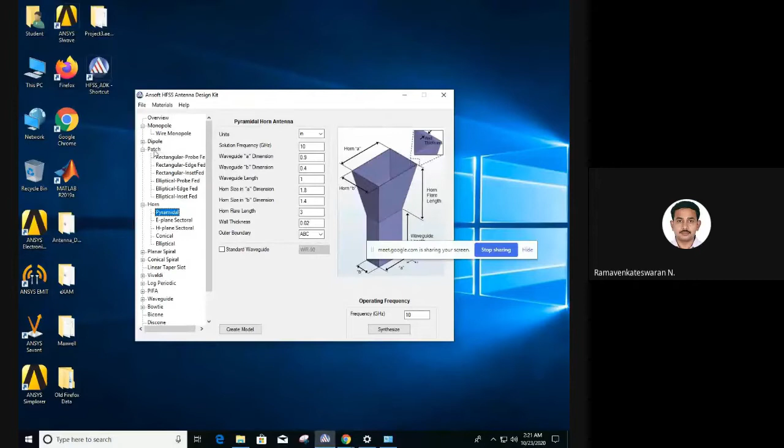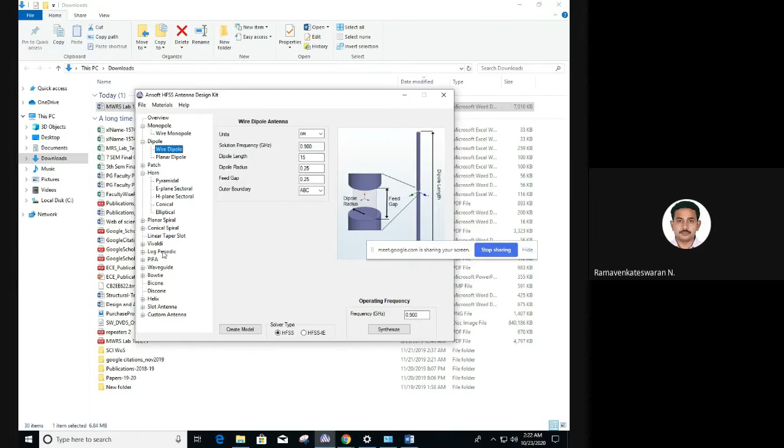Probably this is a wire antenna. This is not a 2D. This is a 3D. So these dipole antennas are typically used in the normal modem of Wi-Fi routers and these structures. We typically use this antenna because it will have good reception power and transmission power. So this is a wire antenna, and also we have a printed type dipole antenna. This is a planar where we cannot have the 3D. When we want to print the antenna, we can use that planar.

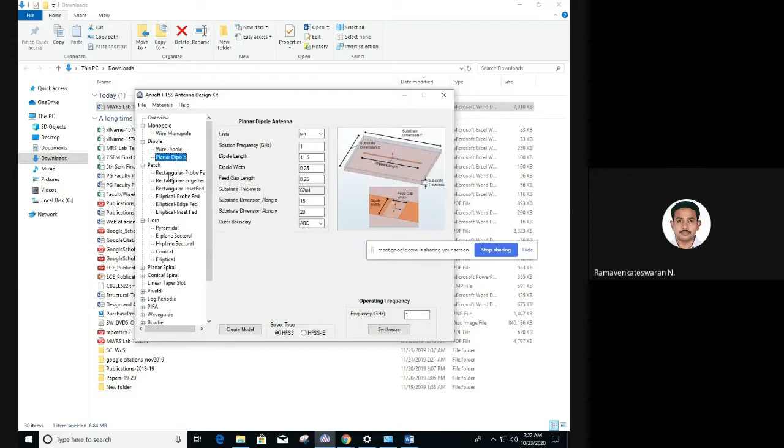So in this experiment, we will be using this planar type, and probably I'll just check that. I will check the manual and tell you. But for the patch antenna we will be using this probe feed, rectangular probe. You can either use the edge feed. You can see the difference. However, all the steps are similar, and we have a pyramidal horn.

Usually it will be waveguide type. So there won't be any printed type for a horn. Basically, this is typically used in high power transmission, either in radars and satellites, so we will have high power transmission using this horn antenna. Okay, this is an antenna design kit, high frequency structure simulator.

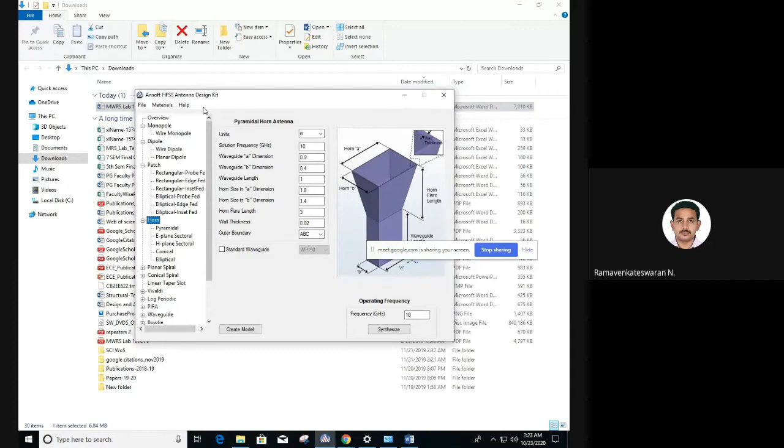Let us start with a patch. I'm going to take a rectangular probe feed, and I can choose any frequency. Let us take 2 gigahertz, either 1 or 10 or 2, anything is fine. When you just synthesis, what happens, right? 1 second. This is,

Yeah, correct. So when I do the synthesis, these values, like the rectangular patch dimensions, you can see them. I cannot expand this window. Probably you can look closely where I'm moving the mouse. So all the units are given in centimeters. You can see the solution frequency, whatever I synthesized, 2 gigahertz, and the patch dimension. So this is my Y and this is my X dimension.

So it's a rectangular type antenna. X and Y need not be the same. It's a rectangular patch, and the dimension is automatically calculated by using synthesis. So if I don't have this design kit, I have a set of equations that are typically empirical equations, meaning it is basically calculated by using the operating frequency. We have a set of equations that will calculate my patch dimensions X and Y, and also the thickness I can keep constant.

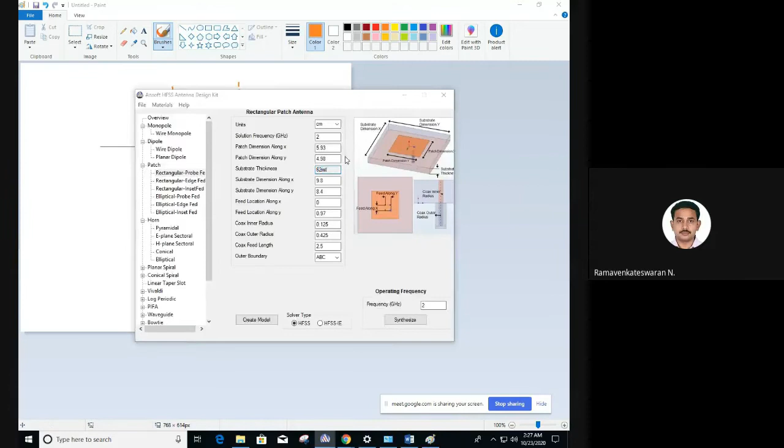So what I have is the patch dimension. So this is my patch. I'll take the other one. I fill it with some color. Okay, this is my patch. This is my substrate. Okay, the patch dimension, I'll take the pen. So this is typically the patch dimension that is given here. That is x. This is y. So here this is y, and this is my x.

Okay, and what else? Substrate. The substrate is typically this. The substrate dimension is y. Let me pick another color. This is my substrate y. The notation is given as both x and y, and this is my substrate x dimension. Okay, so the feed location is this point, exactly at the center. The standard reference is that this is 0 comma 0, exactly at the origin.

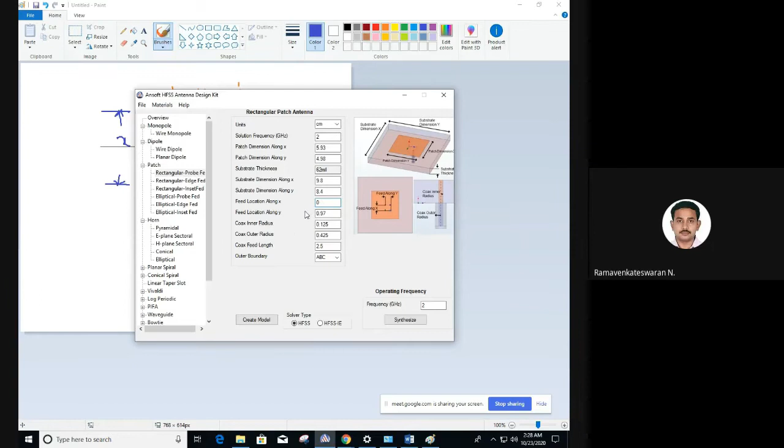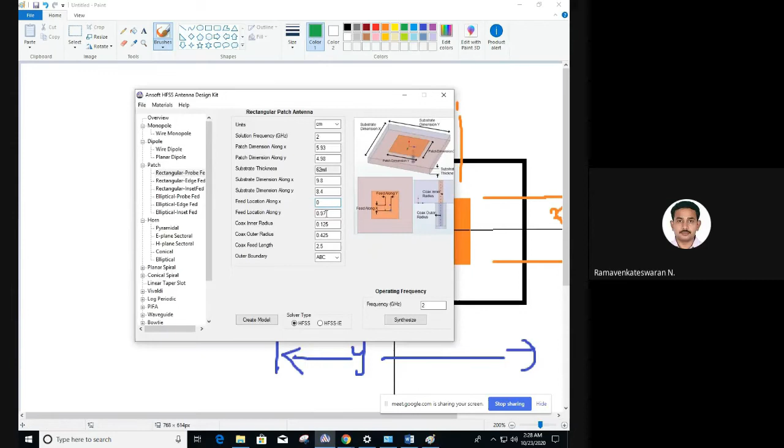I mean to say that x and y both are 0, and you can see that the feed location is a little drifted along the y-axis. Here somewhere is the y location, this is my x. x is 0, y is a little drifted. I'll use a contrast color. So this is my y. This is my feed location, exactly 0 comma 0.57. x is 0, y is 0.57. This is my feed location.

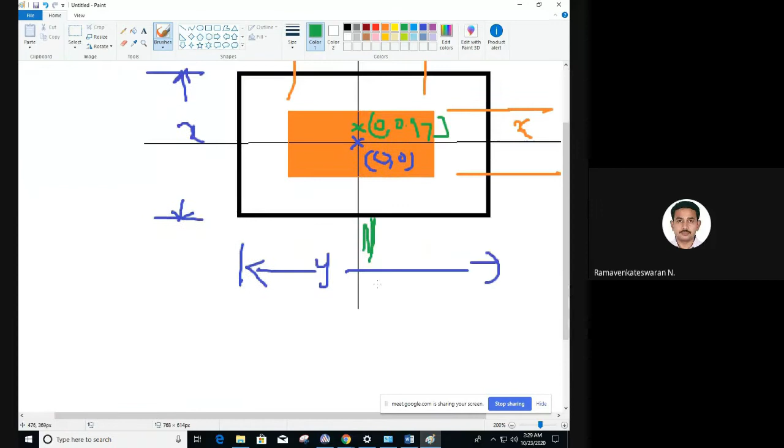So beneath that I'll have one probe. This is 3D, but you can understand that beneath it one probe will be there, connecting exactly to this point. So this is the construction of the patch antenna. Is it clear? The power is fed into this point, that is the feed location. This is my patch dimension x and y, and this is my substrate dimension x and y. So how do I know this exactly? Because this is a design kit. Indirectly they have a lot of algorithms to address those equations. If you give only the synthesis frequency, that is typically enough.

Okay. So that should be a reasonable value. I don't touch it, I leave it as it is. And what are the other points? The coaxial inner radius and outer radius, that probe is there. You can see that if I do the coaxial feed, this is the outer radius of the coaxial line. This is my inner radius. So that is the feed. These are all default standard values basically.

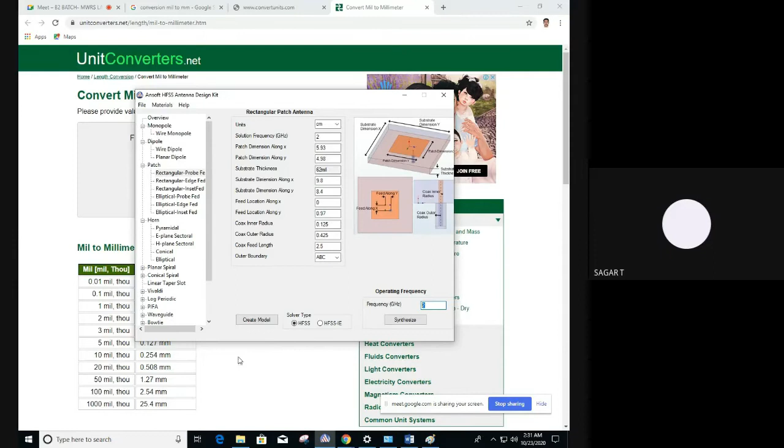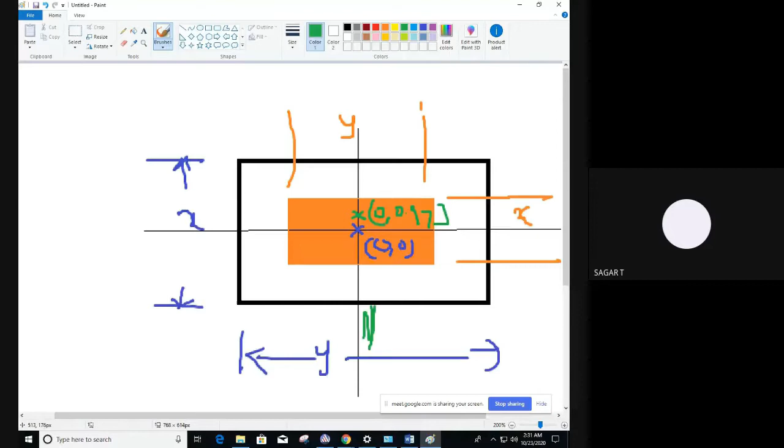Okay. So if you change this, for example, one difference I'll tell you. When you change the operating frequency, I mean the synthesis frequency, what happens to the dimension? Just keep any one of the x and y values, either this patch x y dimension or this substrate x y dimension. Probably I'll copy it as it is. I'll just look into the patch, for example.

This is my 5.93 centimeter, correct? Unit is centimeter, fine. That is my x. I'm keeping y, this is x, right? This is 5.93 and this is y.

So as you can see, this diagram is not in scale, as you can easily observe, because this is a higher value and this is a smaller value. So it's supposed to be like this. Sorry, let me just cut this, or something like that. Okay, now is it fine? Still not fine, because y is small and x is more. Okay, probably I will fill it with more color in this direction. This. Okay, probably it's fine now. Okay, so that way.

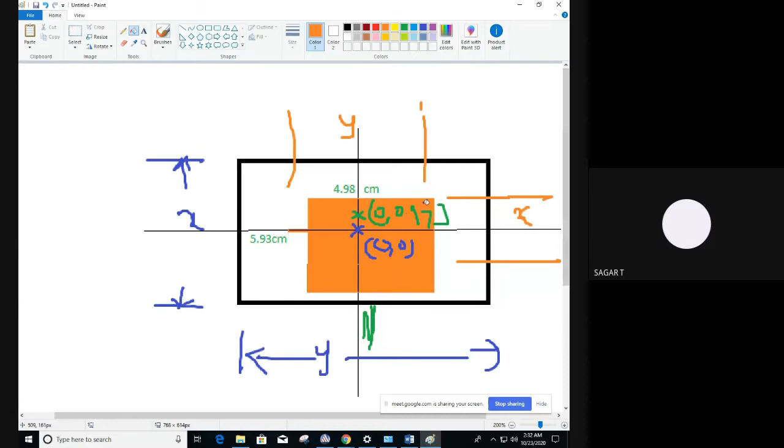Okay, now y is 4.98 and x is 5.9. This is a little bigger. Okay, so my design frequency is what? F is 2 gigahertz. Okay, so now I'm going to change my operating frequency. Let us take 5. I'm increasing it. So what you can observe here is even these values, the inner radius and outer radius of the cable, are also changing.

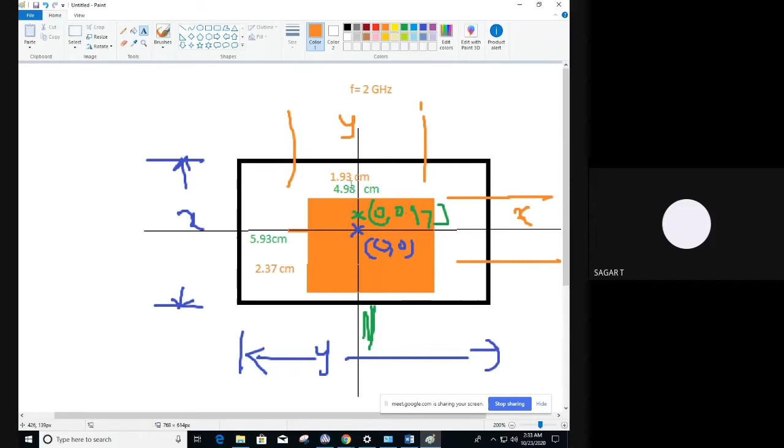And most importantly, this patch dimension, you can see that 2.37, that is x in centimeters. So it is actually decreasing, and y is also decreasing. Okay, so whatever is in orange color is for 5 gigahertz, and whatever is in green color is 2 gigahertz. So what happens now, whenever frequency is increased, the patch dimension is coming down. How is this related? So whenever frequency is increasing, lambda of course is decreasing, right? Because C equals lambda F.

When frequency increases, what happens? This is C by lambda. As frequency increases, lambda is decreasing. So when I design the antenna, I should make sure that the physical dimension of the antenna, either patch or any antenna, the physical length of the antenna should be less than or equal to lambda by 2. This is one of the prime criteria to design the antenna. So if I increase the frequency, the operating wavelength comes down, and when the operating wavelength comes down, the physical dimensions also should come down to design the antenna.

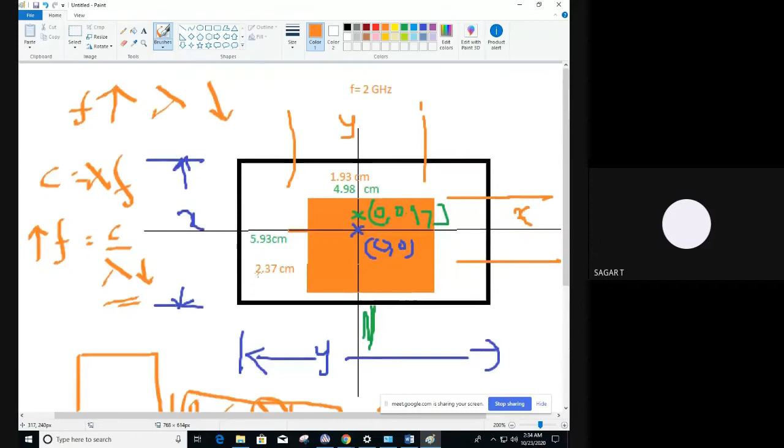So the high frequency antenna will be more compact. That is one of the reasons for going to a higher operating frequency. I can actually fit the antennas in an aircraft and even small mobile phones. I can keep that antenna with small dimensions, a small form factor, so that my antenna works at high frequency. That is a huge advantage when you're going for high frequency.

There are always pros and cons in high frequency designs. If antenna dimensions become smaller and smaller, that is good, but the thing is, it cannot receive or transmit more power, because the area is one of the criteria. It's something like rainwater harvesting: how can you store more water? If you have more terrace area or more open area, I can collect more water. The same thing, if an antenna is bigger, I'll get more power transmitted and received, and gain, of course, will be increased.

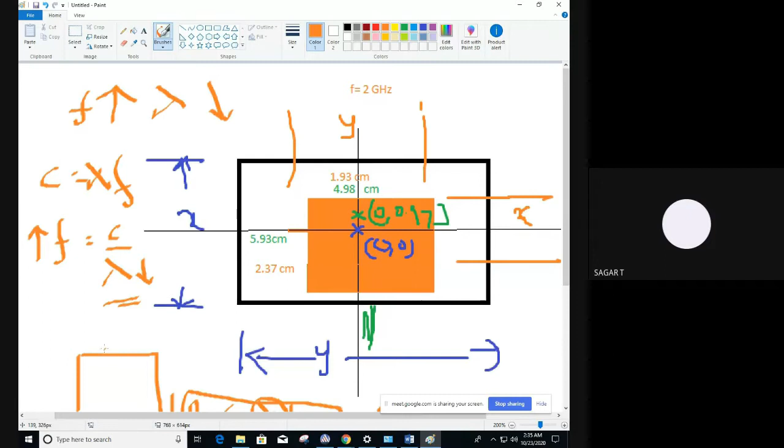So we have to balance it. How much the frequency should increase, how much gain I want, I should balance these two, and I have to effectively design the antenna. Okay, that is the theoretical part. So here, similarly, if you keep increasing, keep watch of this coaxial inner radius.

I will see that. If it is working, then not a problem.

So here, I hope that you got some points. When frequency increases, the operating wavelength is coming down. So the antenna dimension is supposed to be equal to the wavelength, or it should be less than that. So in high frequency antennas, the operating wavelength is very small. The physical length of the antenna will come down. That is a huge advantage when you want to design compact antennas. But the high gain of the antenna will become compromised, basically.

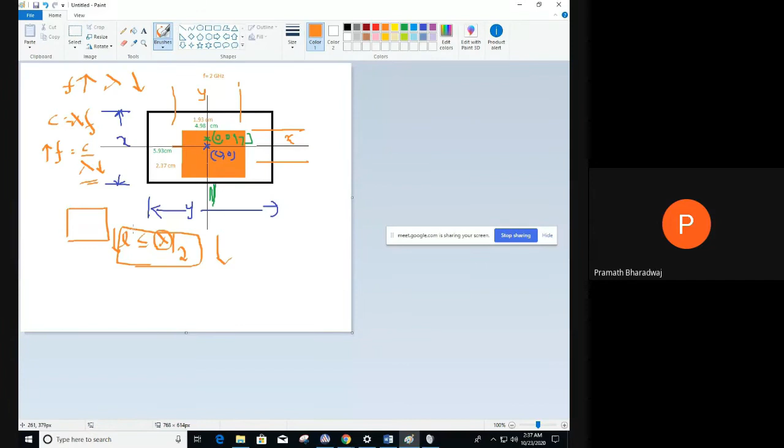So the technique we use is, instead of keeping one antenna, I'll keep multiple antennas. That is one of the reasons for going to 5G technology, where we have multiple antennas, multiple input, multiple output, MIMO antennas. So it can effectively work in high frequency, and also it can have more gain, basically. Okay.

Sir, when you teach, the voice goes low. Use earphone. Okay. Is that? I'm keeping very close. Yeah.

So here, is that clear? We have very high frequency. The wavelength is coming down. Antenna dimension also coming down. So compactness I will get, but probably I have to compromise on gain. So to compensate, the antenna is smaller for high frequency, and also to get more gain, because I need to transmit more power, so it has to be more.

So to balance this, I may keep more than one of the smaller antennas. That's called antenna arrays, so that I can operate in high frequency, and also get better transmission and reception, because the gain will be multiplied with the number of antennas. Okay, so that is a practical project: using more than one antenna to work in high frequency, getting higher gain and higher streaming of videos. Everything they are projecting is to get higher bandwidth, basically.

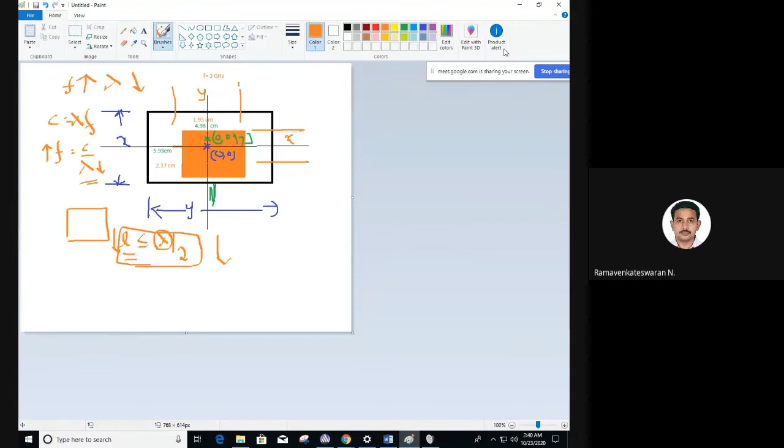If you go to 10 gigahertz, you can see that the coaxial radius is also decreasing and length is also decreasing, and the patch dimension is again coming down. Okay, 1.19. So initially for 2 gigahertz we had 5.93, it came down to 2.37 for 5 gigahertz, and further it came down to 1.19 for 10 gigahertz. So basically, the antenna dimension is coming down.

And the materials, I can choose any materials here. I think it's taking time to open. What I'll do is take the 2 gigahertz, synthesize it and go to material substrate. I'll wait some time for it to open. If not, you can also change it in the HFSS electronics desktop. There also you can change the material. If it is taking time, then we go to create model.

Indirectly it calls the electronics desktop, the ANSYS Electronics Desktop. It will invoke the software. This is the main software, where we will be starting the simulation. So the advantage of the design kit is I don't need to physically draw the antenna. It is available. I only have to synthesize my design frequency, and it will automatically calculate the dimensions. Probably I'm waiting for that to open.

Let us check. Again, I will try that. HFSS ADK, go to patch, rectangular probe-fed, and go to a smaller frequency, so it is better. Let us go to synthesis. Let us take substrate. If it is not coming, try it again. The substrate material is taken by default. You can choose any material.

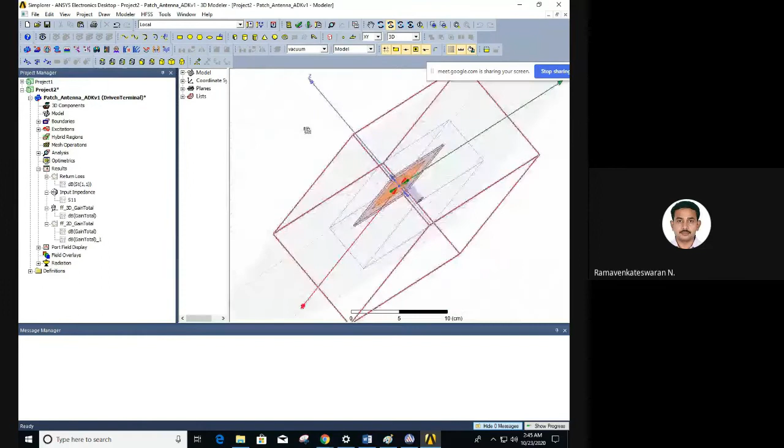The advantage of this design kit is that the antenna, substrate, and these two boxes are automatically created. I'll tell you what these two boxes are and what you designed in the antenna design kit. Probably I can rotate around the current axis. You can see the 3D structure. This is called structure simulation.

ANSYS is typically a mechanical tool, a finite element modeling tool, where mechanical engineers model structures and simulate, for example, thermodynamics and aerodynamics. This is structure-level simulation. This is part of an FEM tool, like a finite-difference time-domain, FDTD, tool. We divide the structure and simulate it.

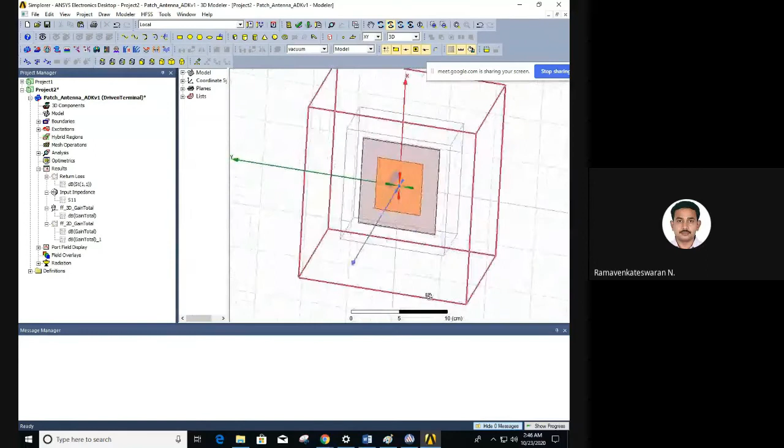This is what we designed in the antenna design kit. One is the x-axis, one is the y-axis, and you can see the rectangular probe beneath is a little drifted on the y-axis. The green color is y. The red color is x, green is y. It is a little drifted, and the z-axis is coming out.

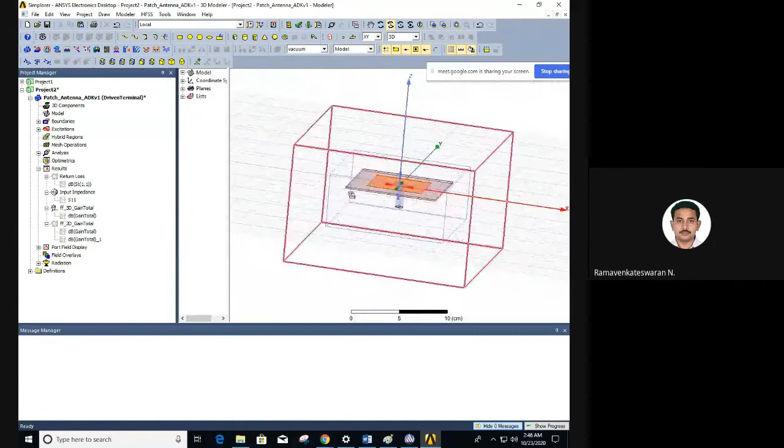So this is my design. The probe is beneath. This is the top portion of the antenna. So what are these two boxes? One box is because the antenna simulation needs a homogeneous medium, not a medium that keeps changing.

If I do antenna measurement, why in a chamber? Why should I do it? We have the antenna lab near the admin block. We need to avoid reflections from surfaces, and also keep the medium homogeneous. We should not have humidity or air particles, because that will hamper the measurement.

Of course we have to keep the antenna in normal free space, but during the measurement, the ideal condition, I should know how the antenna behaves. So the medium is homogeneous. I mean to say that epsilon r and mu r, relative permittivity and relative permeability, are constant here, and one is to avoid any reflections.

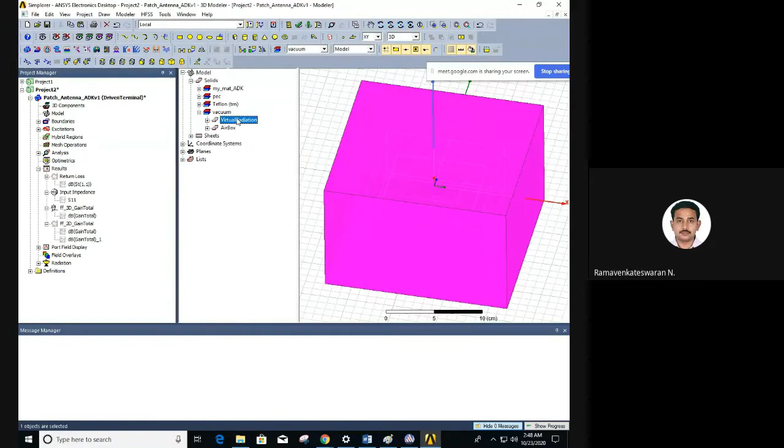Again, you can see that, probably escape and check that. You can see that this is virtual radiation, means there is no reflection, and this is my air box, means it's a homogeneous medium. I tried to measure the antenna in the no-reflection medium, and also the air box will provide me homogeneous epsilon r, mu r. That box is extra, it is added. So typically this is the normal standard we do for antenna measurement.

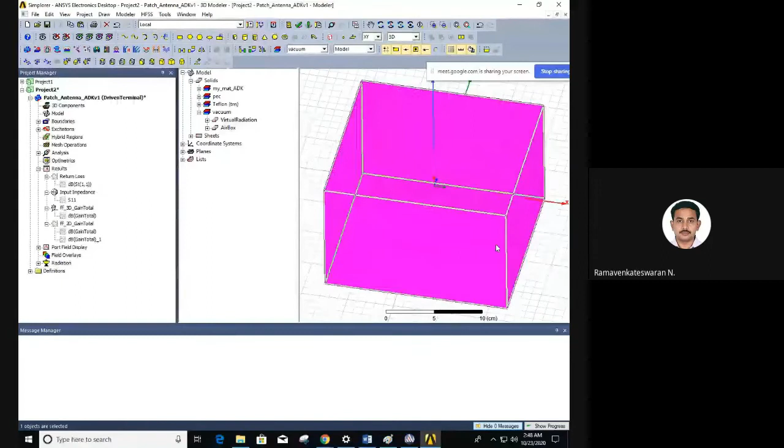Okay, then come to the materials. You click the substrate, this is my substrate. There is one tool, probably what I can do is edit, select by faces, I don't want faces, edit, select by object. Let us take this object, substrate. Okay, so I'm taking this substrate. You can see that the substrate material is my material that I've added.

So when you go to that, right click and properties. This is my material property which I've added in the antenna design kit. Our relative permittivity epsilon r is 2.2, and mu r is 1, constant, and the loss tangent, more importantly, is one of the main criteria to check the quality of the dielectric medium. Okay, light dielectric substrate. So this is my 2.2.

If you come down to 2.2, there are different materials and different names. So this is Nelco, and most of these are developed by Rogers companies in the USA. They have developed different substrate materials which give different relative permittivity. The lesser the relative permittivity, the better for propagation. So that is the reference, basically rule of thumb. The relative permittivity has to be less.

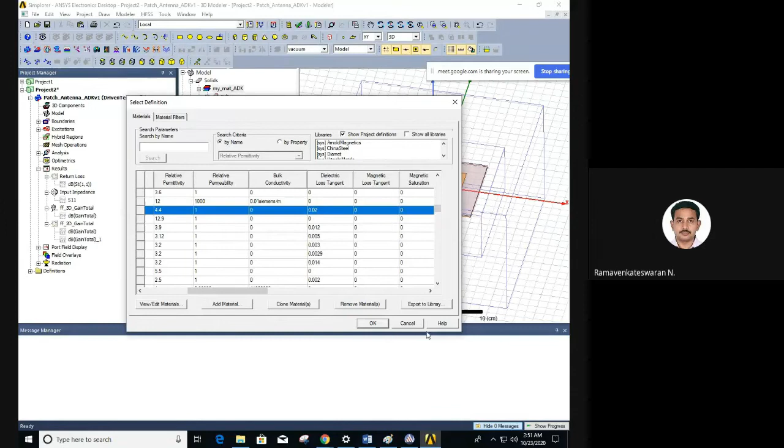And you can see that the loss tangent is 0.02, but there it is 0.0009. That is the difference, basically the performance difference. But it's reasonably good enough. Whatever we have in the lab is FR4 substrate based antennas and passive devices. Okay, so this is how we have constructed the antenna in the antenna design kit.

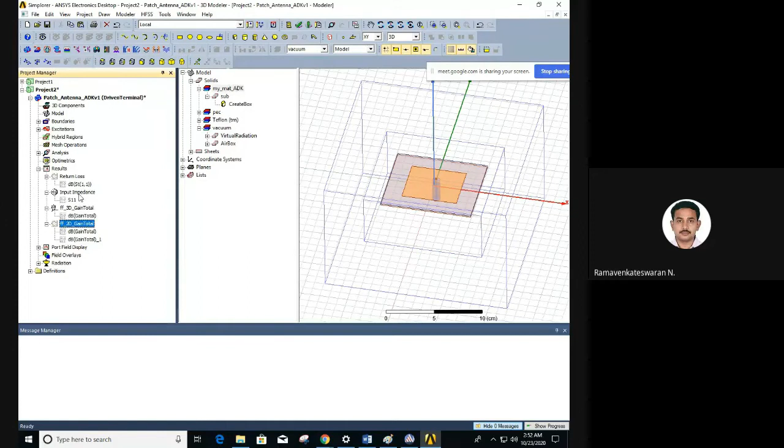And input impedance is another parameter to see how perfectly my coaxial feed is matched to the antenna. So the location is one of the important criteria to match the probe impedance to the patch impedance, because the impedance varies throughout the patch, since the voltage and current around the patch vary.

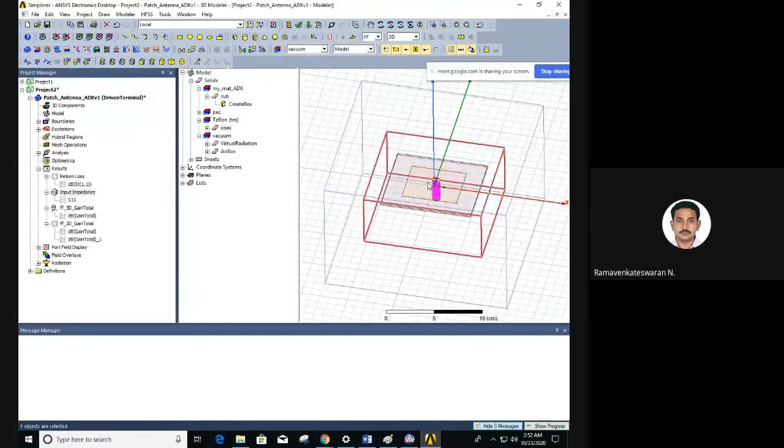So voltage by current, impedance is also varying, distributed. So I have to find out the location where the impedance is equal to the probe impedance. Usually the probe impedance we keep at 50 ohms, right? Practically, in the generator, you have that 50 ohm coaxial cable. So I try to match this impedance between this patch and the coaxial.

I just put it at the right location so both impedances are the same, so my reflection can be minimized. That I can find out by using return loss and also impedance. What is the input impedance at this point, the feed point, or what is the input impedance for my design frequency?

Okay. So one more thing is when I design the antenna, if I design for 2 gigahertz and it's working at 2 gigahertz, it is well and good. If it is not working at, for example, 5 gigahertz, it's not a problem because that is not my design frequency. If it is not working at 1 gigahertz, also not a problem. But one thing is we can design the antenna only for a particular range of frequency. We cannot have an infinite bandwidth antenna.

That is not possible. That is one of the reasons why earlier, when we bought 4G phones, they were not compatible with 3G, because the modems and antennas they designed and the modulation schemes are totally different. So they could not use the same antenna. In the later editions, they support 3G and 4G; they expanded to 3G and 4G compatible modems.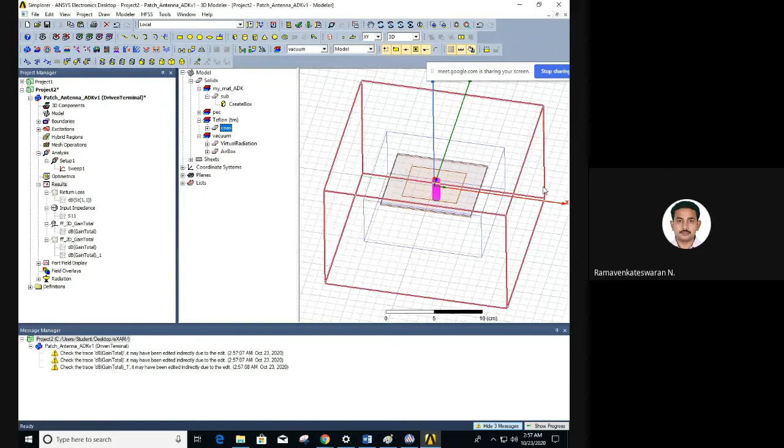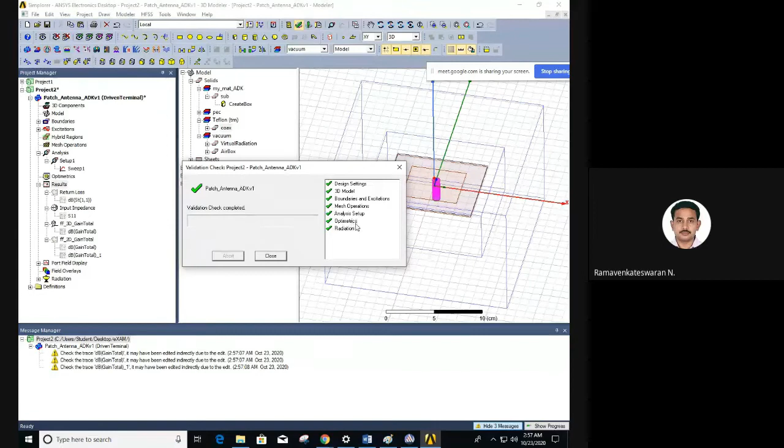But if it is manually drawn, if you're making your own antennas, if you simulate and check it, if there is any small gap, at some point it will show an error. Those errors will be reflected and notified here. So it will check everything: mesh, analysis setup, optimetrics, radiation. And once it is done, analyze all. It will ask to save the project. I'm going to save it in lab1_RMV.

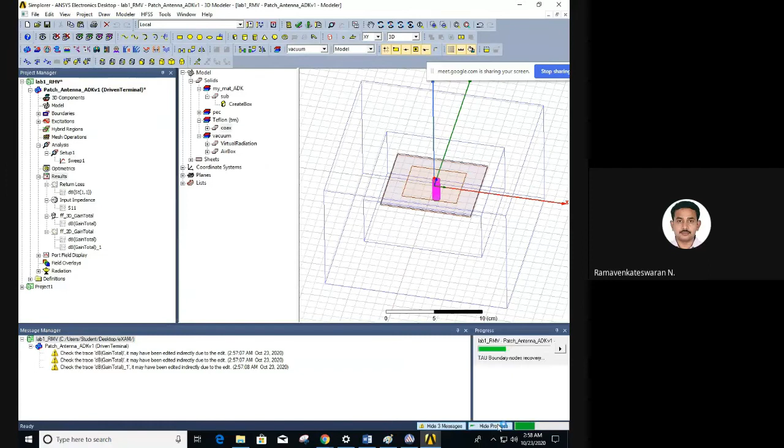Okay, so it will take some time to simulate it. You can see the status here. Since we have not changed anything, and the frequency is relatively low and the sweep range is small, we will get it immediately. Now you can see the progress here. Meantime, right click on the results; we are also interested in VSWR. VSWR, return loss and input impedance are all called terminal solution data report. So right click on results, terminal solution data report, and VSWR we can get in terms of tables, or as a graph. I can go to rectangular, and here I need the terminal VSWR parameter.

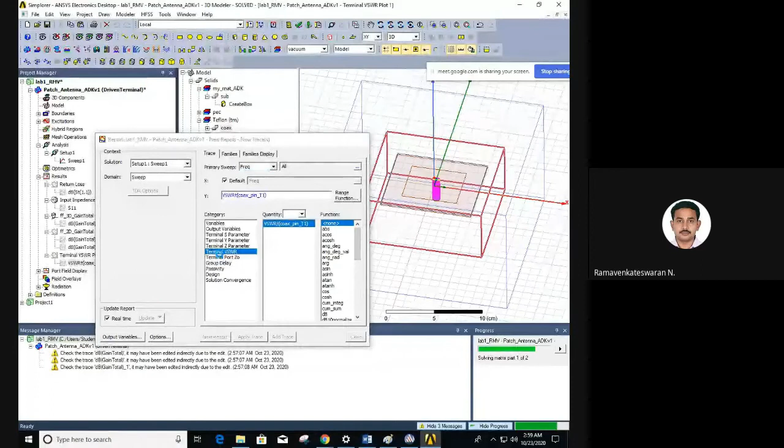VSWR, you know, is a number starting from 1 to infinity. So I choose that VSWR. I want to sweep for all frequencies, from 1 to 3 gigahertz. So let it be as it is. There is no unit for VSWR, only numbers. So I'll just create new report. This VSWR plot will be added once the calculation gets over. And the input impedance plot will be there in Smith chart form. If you are able to read it from the Smith chart, fine, or else I can see that input impedance in another way.

If my voice is not clear, you can tell me. Are you able to listen to me? Is it audible? Just put it in the chat. Okay, fine.

So if I'm able to read input impedance from the Smith chart, fine. Or I can do it another way. Go to results. The return loss, VSWR, and input impedance are all terminal reports. And the gain we are seeing is the far field report. We are not going to use the emission test reports and modal solutions; those are used for some other purpose. So mainly we will use the terminal solution data report and far field report.

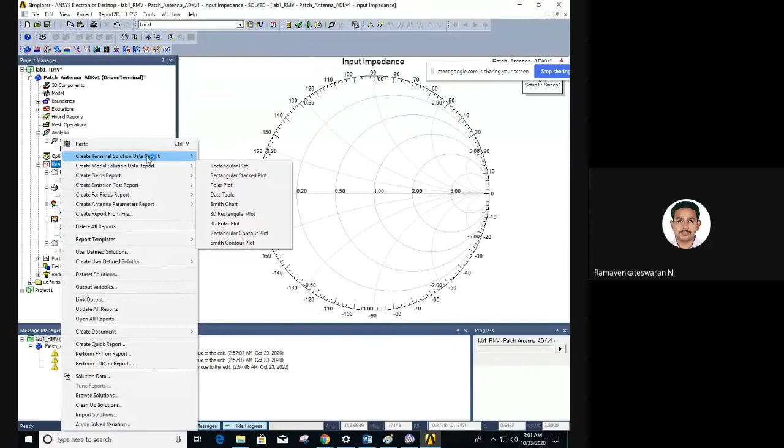Far field is the distance of the receiver antenna to measure the gain. When it is radiated, what is the far field report? We will get the gain and directivity of the antenna from here. Only the gain is added so far; I'll come to directivity. So let us add the input impedance. Go to the terminal solution data report, go to the data table, and I want all frequencies from 1 to 3 gigahertz.

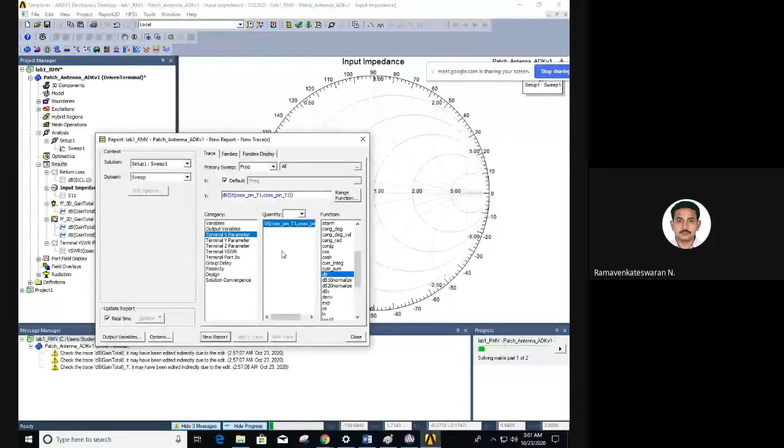The input impedance is a complex number. If I get only the magnitude, that is good enough. For a plus ib, the magnitude is root of a square plus b square, right? The category is terminal Z parameter, because this is impedance, and the function is what I want, basically the magnitude of the complex number. Create new report. Apart from that, with the gain I need directivity. Directivity is a far field report. Go to the far field report. I can do it either in the 3D pattern or 2D pattern.

So it is better to do the 2D, because 3D again may take more processor time. That is very minimal, but 2D is enough to analyze basically. And 3D if I want, we can go to it. So report, and I can go to the radiation pattern or rectangular plot. So I'll go to the rectangular plot.

The radiation pattern is actually the polar plot. So either way it is fine. I'll just go to the rectangular plot. So when it comes to here, the gain pattern or directivity, what angle I want to see that. Okay. So normally, you just come to place, you see the directivity and gain.

There are two variables. One is the frequency. So frequency is 2 gigahertz, and the phi. Here you're going to theta, you're going to simulate all from minus 180 to plus 180. Okay, this is different. When you select this, everything will come. I don't want one frequency, I want all theta simulated. What is this theta? What is this?

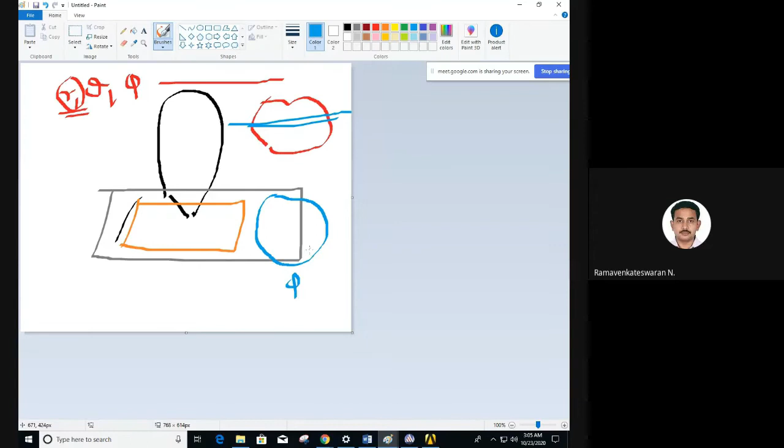So take, for example, an apple. I'm just trying to draw this shape. What you do is cut this apple horizontally. When you see that apple from the top, it may look like a circle. So that is called phi. It's called the azimuthal plane. This is typically in the spherical coordinate. This is my phi. This is the horizontal axis.

Cut the apple horizontally. Look at it from the top. That is my azimuthal plane. Starting from 0 degree here. Normally we start here. This is my 90, behind it is 180, and here is 270. Again coming back is 360. So that is my phi value. That is the azimuthal plane, the horizontal plane.

So when I cut the apple vertically, like this, take another color. When I cut the apple vertically, I'll get this kind of shape, correct? So this is called elevation plane. This is called elevation plane. That is the vertical plane.

This is theta. This is my 0 degree. This is my 90 degree, below this 180, and this is 270. Coming back here is 360. So this is elevation. You can see that from buildings also. Civil engineers do the top view and elevation view.

Elevation view is the front portion, how the building will look from the front. So when you're standing in, for example, the EC department, seeing the notice board and entrance, those are all elevations. You are seeing from the front. That is the horizontal axis. Sorry, you are seeing it vertically.

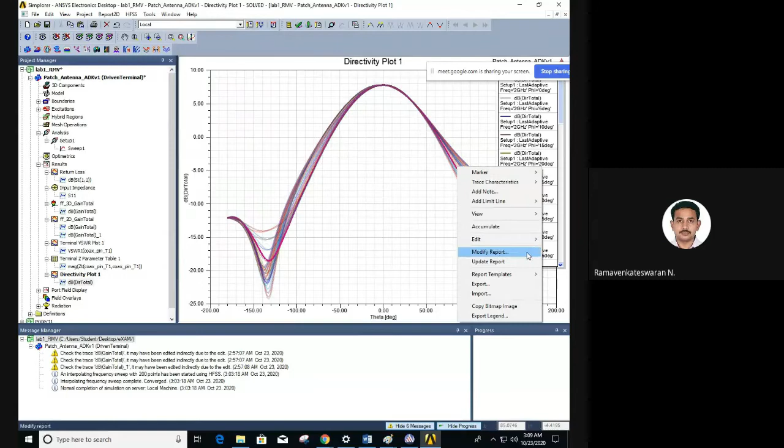So what you can do is right click and modify, and you can choose that. Go to phi, just change it to any one value, put 0 degrees, close this window, and apply trace. You get only one value. This is quite good enough, because you don't need to go all around the building horizontally when you understand it is a square shape. Only one side is enough. This is the azimuthal, horizontally looking plane. This is the only change you have to make.

So let us go into all the results. I hope this is somewhat clear. So what I've done is open the ANSYS software, and you get the default return loss, input impedance, 3D and 2D gain. Apart from these, I need terminal VSWR, terminal Z parameter and the directivity plot. So these three plots I have to add extra.

Now let us go into one of the important results: whether my design frequency is correctly captured in the simulation, and am I getting the right characteristics at the design frequency. So go to the return loss plot; this is my design frequency. Use the marker here, add marker. It will tell you the X value and Y value. The X value is 1.9347 gigahertz, and I'm getting a return loss of minus 70.

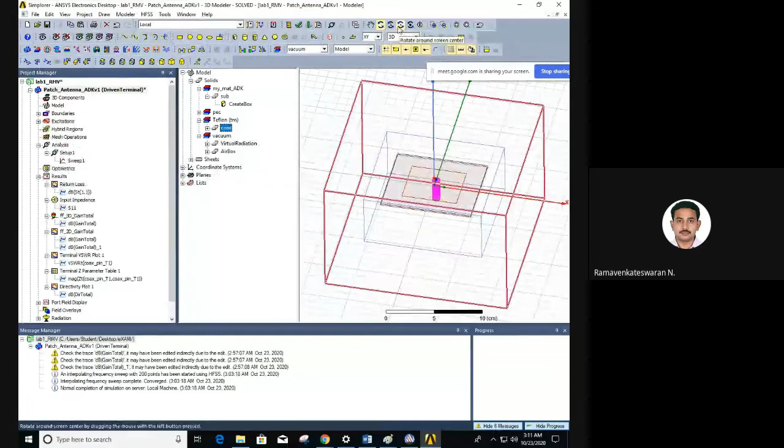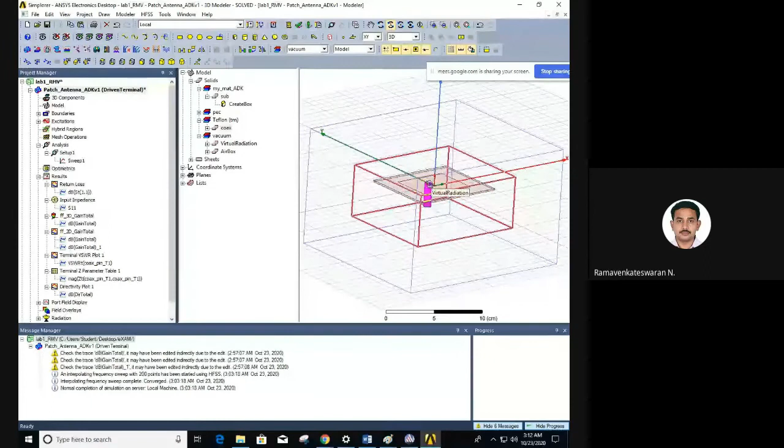There is no impedance mismatch in this. So whatever impedance the coaxial cable has where it touches the patch antenna, it's correct. If this is not correct, I may not get that for the design frequency; it's further drifted. The impedance difference at the point of contact between the cable and the patch antenna will be more, so I will start getting more reflection. So the return loss will be higher for my design frequency if the feed location is not correct.

So how to correct it now? I know that there is a small drift. How to correct it? Go to the project, right click here, choose this patch antenna, go to the design properties, and there are feed locations. By default, it has taken 0.97. This is from the antenna design kit.

We're going to change this by trial and error, but this is not the right method. We have a set of equations to find out the exact feed location. HFSS has tried its own method, but still it is not very accurate. So either you go back to the equation and do it, or, because of the time constraint in the lab, we can manually increase or decrease the value a little. This is 0.97; I'll try to increase to 1.5, some higher value. The point is drifting a little further away from the center.

Once you have changed this, the results are not valid, that's why you're getting a cross mark. So I have to validate again. Validation will come automatically, but I have to analyze all. That means I have to simulate again and find out whether my return loss is improved, whether I'm getting the return loss exactly at my design frequency. So it will take some time.

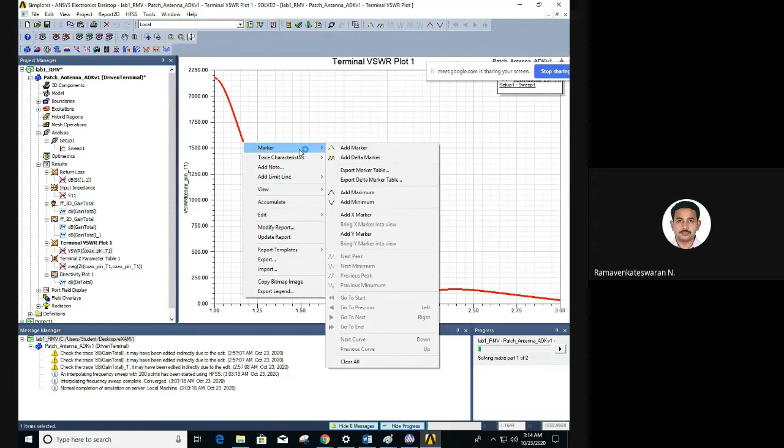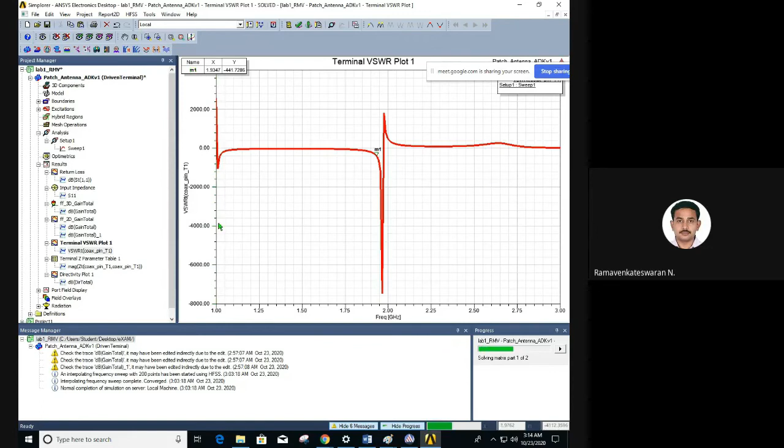Meantime, I'll check the return loss again. You can see it is still not done, so let us take time. I think now it is. Let us go to the VSWR. The VSWR is actually close to minus 441. This is not acceptable, right? It's too much drifted, and the return loss is further drifted. What I've changed is too much probably, so I have to change it very little. This is the previous value, but whatever value I'm getting now is not acceptable.

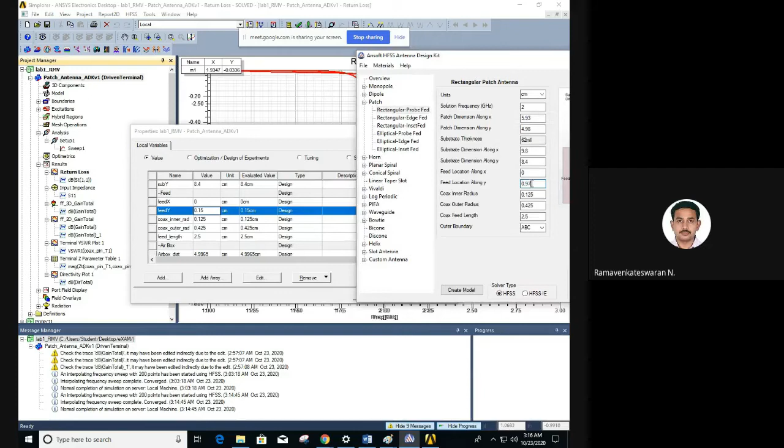So again go to design parameters. I've changed the y value too much, just reduce it to the initial value. From the design kit it's 0.97. Oh, I've changed it differently; it was supposed to be close to 1 point, and I changed it to a different value. That is the error, that is the problem. So the ideal value is 0.97, and what I changed is not correct. This is the exact previous value, 0.97.

So I have to add a little, not too much. What value can I add? 0.03 makes it 1. Let us add 0.05: 0.97 plus 0.05 is 1.02. Okay, I'll just change to 1.05. Let us see. I need not change x. For the safer side, I'm changing only y, because if it starts changing in both directions, I may miss the correct spot. That is the reason I'm changing only y, not x. I changed it, simulating again. Analyze all.

So it will take some time, and okay, is that clear now? Okay. So what I will do is, it is simulating it. So only if we have to change the location. If I am not able to get, for example here, the design properties, so if I'm not able to get exact return loss at design frequency, I change this location and try to set my return loss very less at the design frequency.

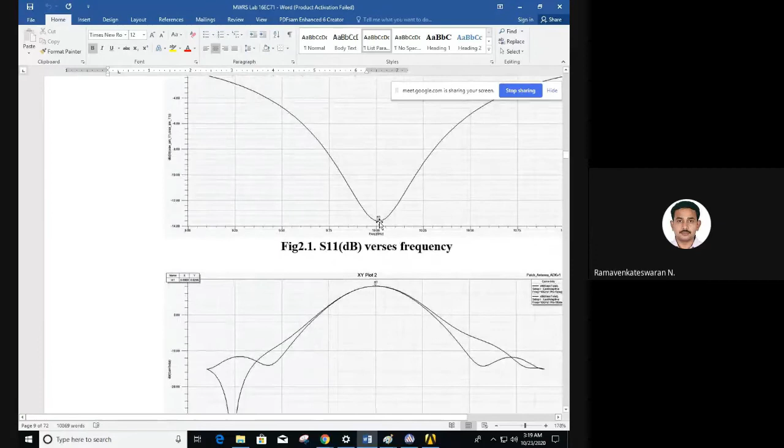Okay, and this is the results. You can add a number of results; the feed location you can change, to bring the return loss exactly to the design frequency. This is the radiation pattern for phi. They plotted two values, 0 and 90°. 0° is quite good enough. If you want, you can add 90° also.

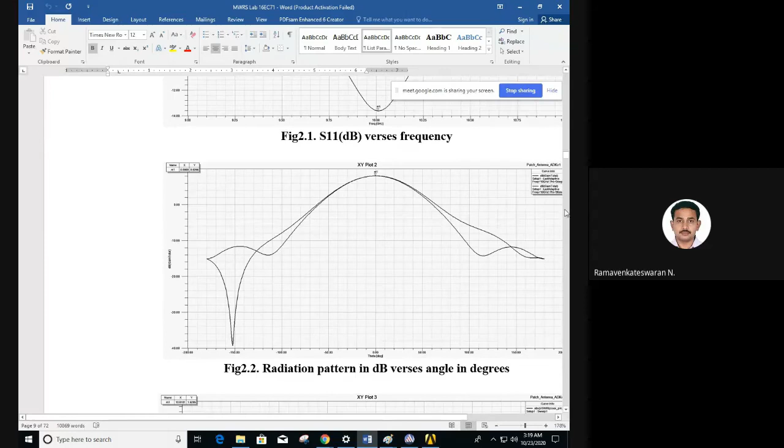This is a VSWR plot. For my design frequency, the VSWR should be very less, close to 1. So these are the plots I have to check. Let us see whether I got it. Okay, I think you can see that the return loss initially was on the left side. Now it went to the right side of 10 gigahertz, correct? It is still simulating. Let us wait for some time.

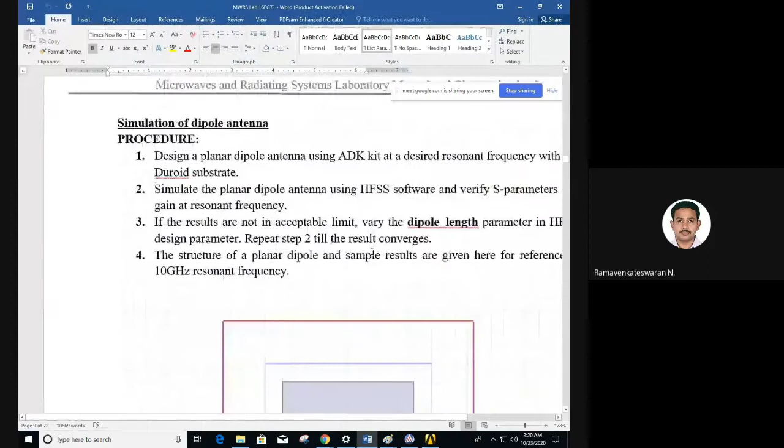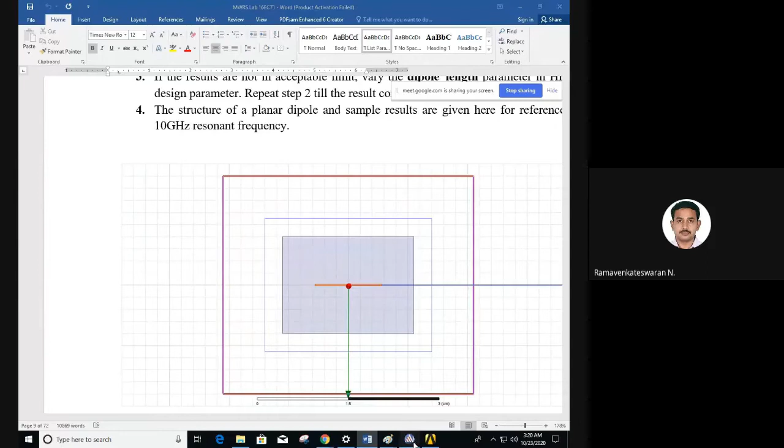So, okay, let us take this time. What we have to do next is similarly, we will see it probably in the next class, the dipole antenna. This is a microstrip dipole, the second option in the antenna design kit. The next part of the first experiment is go to the planar dipole, choose the frequency, synthesis and create a model, and we'll get this kind of plot. Again, we have to find out the return loss plot, and we have the radiation gain pattern and VSWR plot.

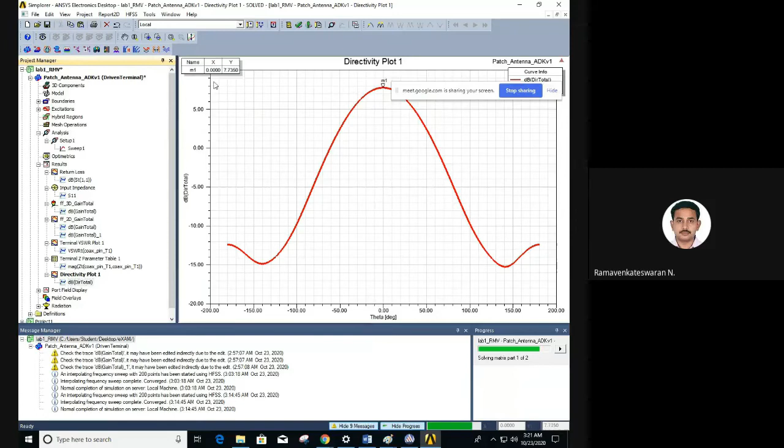So here we got the gain close to 0 degrees. Just add the marker here at 0 degree. You can see 7.341 dB. This is my gain plot, and directivity also you can just note down here. This is my directivity plot. Add the marker at 0 degree. So this is 7.735, and the gain is a little less, correct? Gain is 7.3, directivity is 7.7.

So usually there is a relation between gain and directivity of the antenna. The gain is efficiency times directivity. Okay, that is the relation. So the efficiency times directivity is the gain of the antenna. So here we got close to I think 5.7 dB. This is 5.5 dB I got.

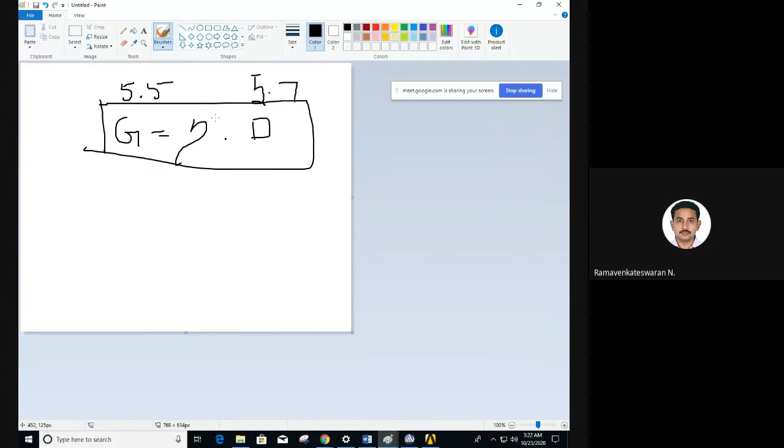So many times the efficiency of the antenna will not be 100 percent. It will be less than that. This we call the antenna efficiency, that is AEF. It involves many factors, the impedance and the dimensions, everything. So since the efficiency is not 100 percent, the gain of the antenna will be typically less than the directivity. So what is the gain and directivity?

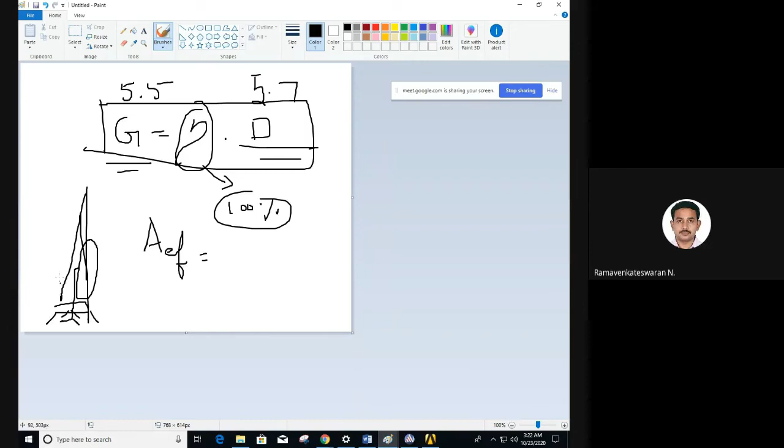So if you take this antenna, when you place it on, for example, the mobile towers, the cell phone towers, I don't want it more directive. I think you can see that in the mobile towers there are kind of tube lights; antennas will be there. This is called a sectored antenna, and it will have a higher coverage basically.

So when you have a higher coverage, all the cell locations will be divided into hexagonal shapes, and each hexagonal shape is covered with one sectored antenna. It will have a higher coverage basically. So when you have that higher coverage, it means that it is not more directive, it's less directive. More directive is when it is concentrated on one direction of the location.

This is less directive, what we use in the cell phones, but the advantage is I can cover more area basically. They don't want to install antennas, mobile towers, in every place; it's not advisable. So they will try for a less directive and high coverage antenna. There is one more term, theta, the half power beam width, that is the beam width of the antenna. The broader the radiation, the broader the coverage, the higher the beam width. So whenever you have a higher beam width, you have a high coverage, less directive.

Suppose, for example, this is my Earth here, this is my Mars, and I want to keep the antenna somewhere like this. This is my antenna. It should be a little tilted, however, this is just for a demonstration. This is my antenna I'm keeping here, and this has to be Mars. I have that satellite, and I have to track it in Mars.

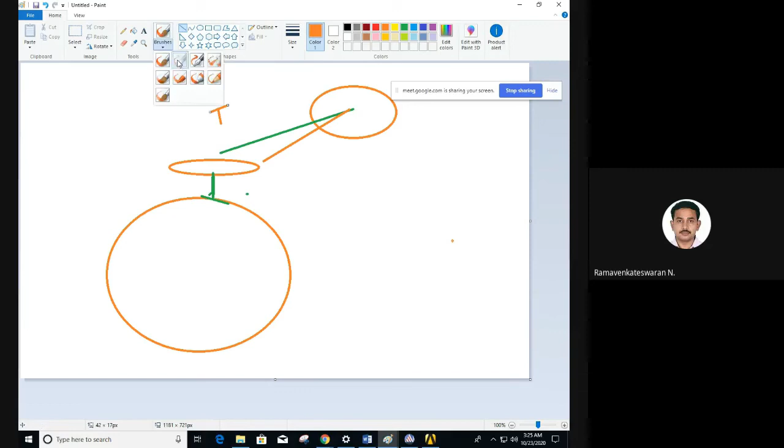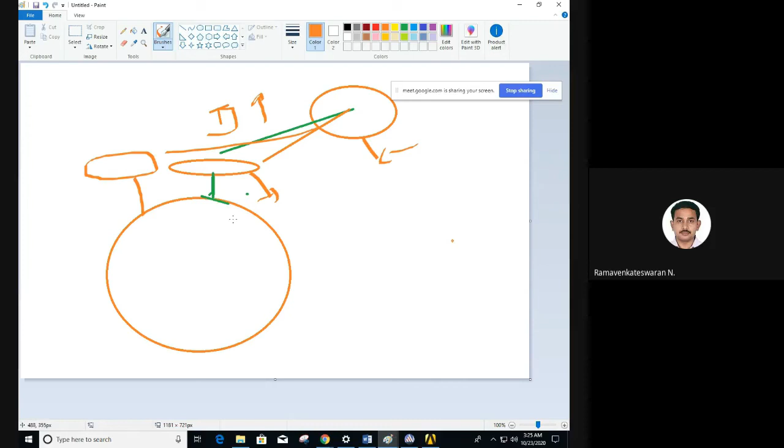So with this antenna, I cannot have that wider coverage. It should be really highly directive because it has to travel so much distance. The directivity should be very high so that it will cover so many kilometers. So we use very big, wide antennas to contact the satellite. This is a high directive antenna, but the beam width will be very narrow. It will have a very sharp beam. This is my radiation pattern, a kind of point beam. That is the balance we have to do.

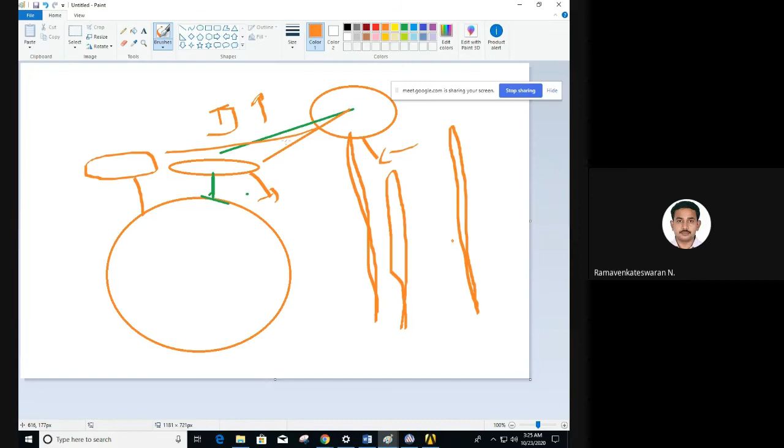So if you want more distance traveled, I need a more highly directive antenna. If I don't want the reach but I need more coverage, I have to go for less directive antennas.

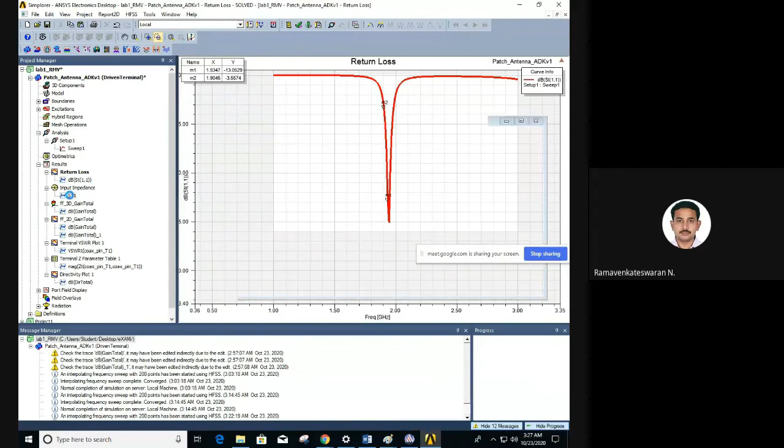And for the input impedance part, if it is difficult to understand in the Smith chart, we can go to the terminal impedance parameters. I've done it with respect to the table for a design from 1 to 3 gigahertz. I've written the magnitude at the connecting point of the coaxial cable to the patch. So at my design frequency, that is 2 gigahertz, the cable impedance of 50 ohms should be reflected at the feed location.

So what I mean to say is that at 2 gigahertz I should have 50 ohms. I think this is my magnitude of Z. I'm getting 200; probably it's not correct. I'll just try to change it here. Let us modify the report, terminal parameters, just take the magnitude. Okay.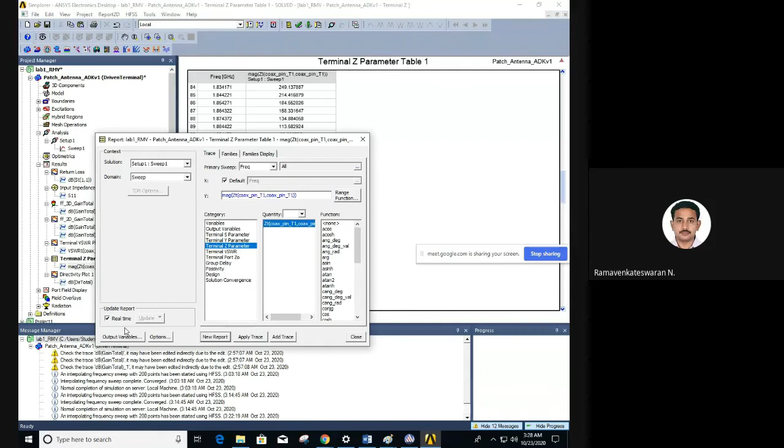So here, okay, I'll come to that probably when I'm talking about the dipole antenna. I will tell you that this impedance has to be exactly matched to the 50 ohms. That is the ideal match we usually talk about. So I'll check that. You also try that. The manual, I think, maybe skipped it, I'm not sure.

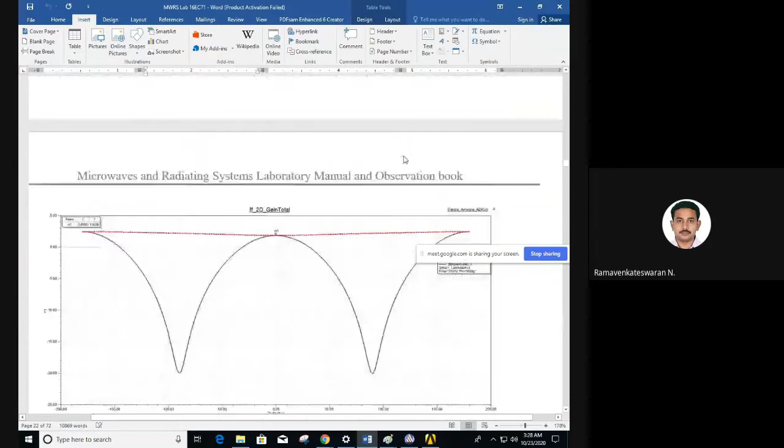You can verify the feed locations when you do that, and write down what impedance you are getting. That is quite good enough. Whatever impedance you are getting, let it be those values. Okay, so that is the impedance. And when it comes to the directivity, I've shown what the directivity is. Then comes the VSWR at my design frequency.

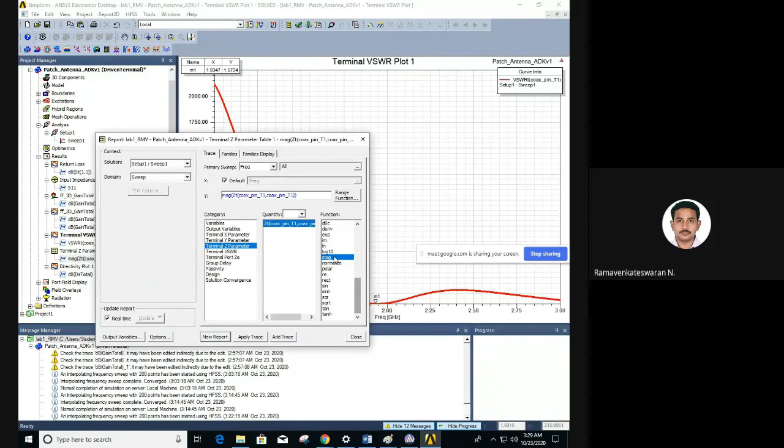Okay, I think I made a mistake here. So it's a terminal port selected here. Let us see, modify report. Terminal Z parameter. So okay, this is okay. There are mistakes here. It's supposed to be the magnitude, right? Let us go to the magnitude. This is modify report. It's correct. This is the magnitude I've given. Let us see. Okay, I'll check that later.

So coming to the VSWR, at the design frequency I should get near to 1. I'm getting close to 1.57. It's good enough, but if I change the feed location, I can get an exact match. The exact match I'm talking about is that the return loss should be low enough, typically less than minus 15 dB return loss.

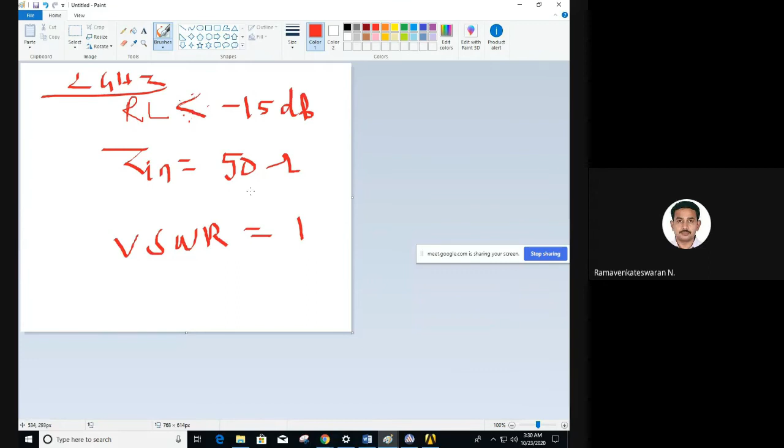And the input impedance at that location is 50 ohms, so that my VSWR is 1. This is my typical ideal value of 1 for the design frequency. This is our desired property: the return loss has to be lower, and input impedance should be 50 ohms. I'll check this and update you in the next class. And VSWR is close to 1.

So why is it an ideal value? Gamma is the reflection coefficient, which is ZL minus Z naught over ZL plus Z naught. This is not a magnitude, just gamma. If the coaxial feed is perfectly matched to the patch, the reflection will ideally be 0. The return loss is minus 20 log of gamma. If gamma is 0, log 0 is infinity, so I'll get minus infinity. This is the ideal value. That's why more highly negative is good. That is my gamma and return loss.

So what is the input impedance? This ZL I can write as Z in, the input impedance. It is the impedance at the point where both interfaces are connected, the coaxial cable and the patch. If gamma equals 0, perfectly matched, then Z in equals Z0. For example, my coaxial cable is 50 ohms, so the input impedance at the meeting point of coaxial cable and patch should also be around 50 ohms. That's why I expect 50 ohms input impedance.

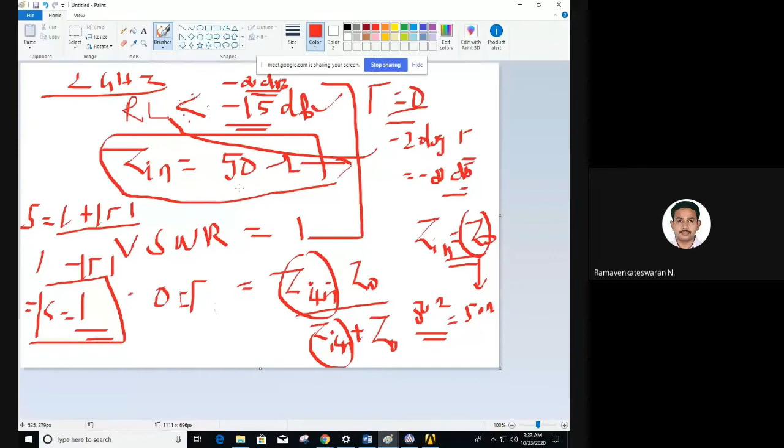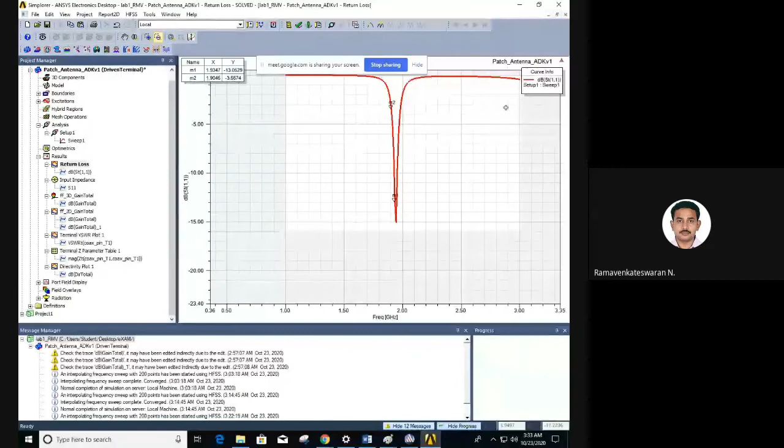So the ideal characteristic of the terminal property is that the return loss should be minus infinity, but that is theoretical. Practically minus infinity is not possible. So if you get more negative dB, that is good enough. That is what I'm looking for in the return loss plot. The less the return loss, the better the match; there is not much reflection. Similarly, wherever the VSWR is near 1, that is the better point.

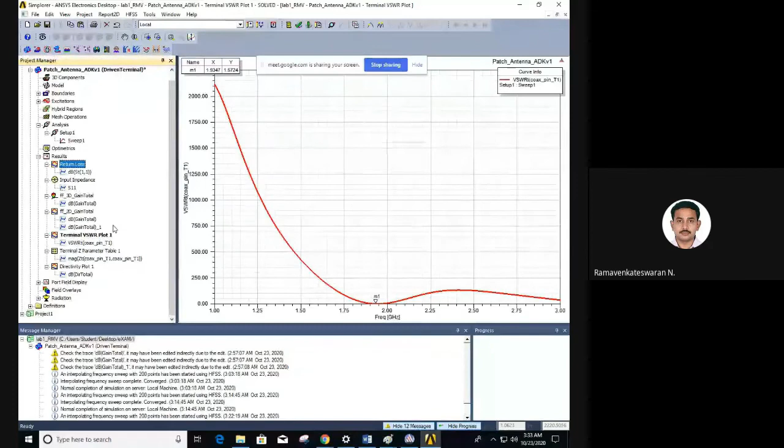And the return loss also I told. The input impedance I'll just verify and tell you. And gain and this directivity I told. This is the gain I will get for this patch, and the directivity is a little higher than the gain because of the efficiency.

Okay, the same analogy you can explore for the horn antenna and dipole antenna. The main thing you want is the return loss plot, and the other sibling is the input impedance, and then VSWR. For a practical sense, it may not be necessary. If I know the return loss, everything is known basically. And gain and directivity, again, are like twins, like brother and sister. If I know the directivity, I can find the gain of the antenna if I know the efficiency. If I know the return loss and gain, that is quite good enough.

What is a 3D plot? So with the 3D plot, I can see how the beam is for the patch antenna. I can see the patch is beneath, and this is my rotation. I can rotate it. Okay, I can rotate the antenna, rotate the beam and see how it will become. So the pattern is bigger because it is not very directive.

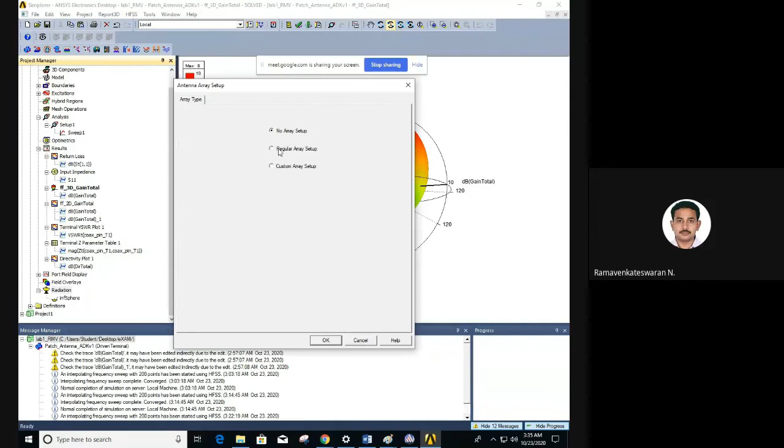How to make it more directive? It is not in the manual, but we can do that. What I can do is go to the radiations. Instead of one antenna, I'm going to give multiple antennas, make a rectangular array setup, make it a regular array. So here, first cell position, I'm going to increase the number of cells, meaning I'm going to increase the number of antennas. Instead of one antenna, let us take 4, or 3 cross 3, which is very high. Probably let us take a nominal value, 2 cross 3, 2 rows, 3 columns. So totally 6 antennas.

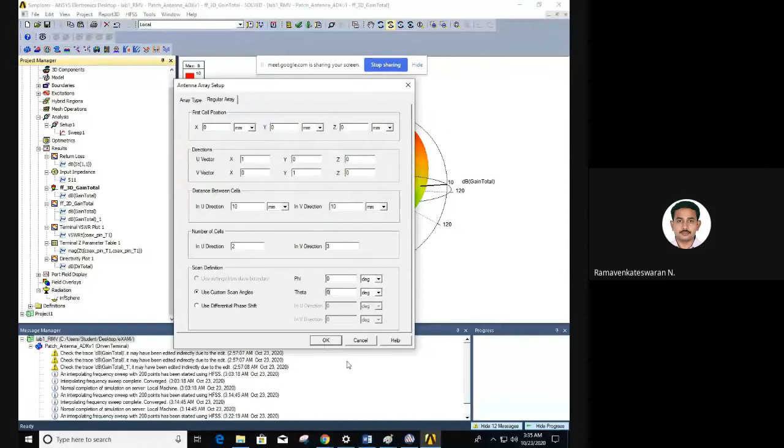And let us keep this theta and phi at 0, because I just need the azimuthal and elevation planes at exactly 0 degrees. This is in degrees, and this is again degrees. And let it keep the distance at the default value. So I'm just going to increase the antennas. And when you do that, I don't need to simulate this. That is the advantage of using an array, because there is the array factor, a multiplication factor: if I know one antenna, I can find out the radiation pattern of n antennas just by multiplying the array factor.

Okay, 3D pattern. You can see the 3D pattern. The shape is retained, but you can see that the gain is increased to more than 15, 20. If you keep increasing the number of antennas, you will get even more gain. Basically, by increasing the number of antennas, I can actually get more gain.

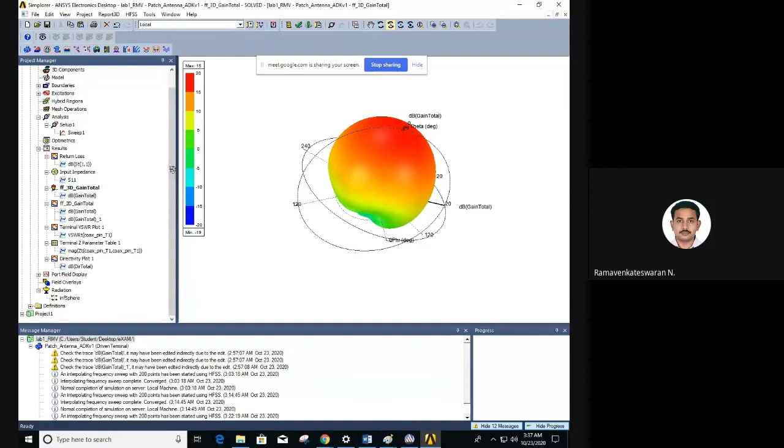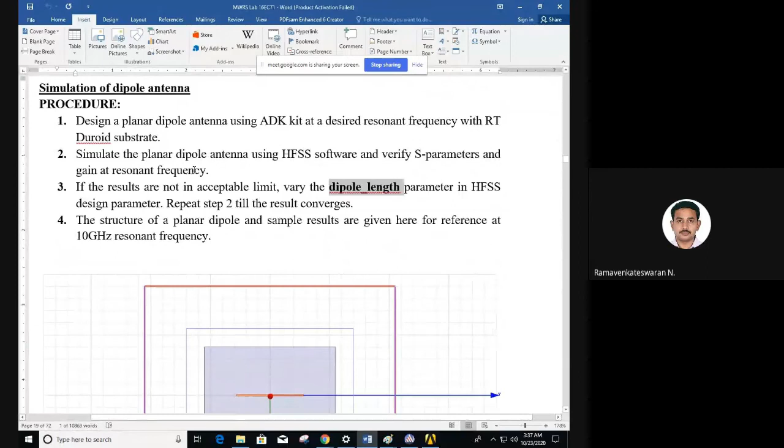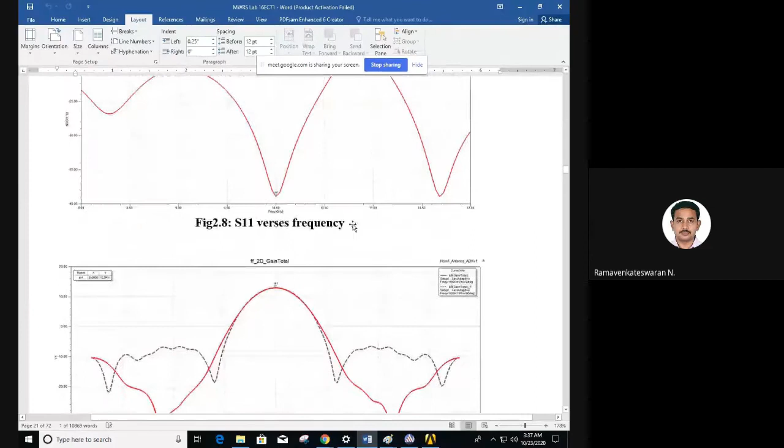So try it yourself, and just follow it as it is. There is not much difference. Only for a dipole antenna, just as you changed the feed location, you have to change the dipole length to fit the return loss exactly to the design frequency. That is already mentioned here. And the horn antenna is very straightforward. You just need to go to the design kit, choose the frequency and simulate it. You will get a similar return loss plot. This is the radiation gain plot, and you just mark everything, so you will get the observations out of these experiments.

Okay, I hope some points are clear, some points may not be clear. I know the azimuthal and elevation planes need some time to understand, but with this minimal understanding, by doing it you can understand even better.